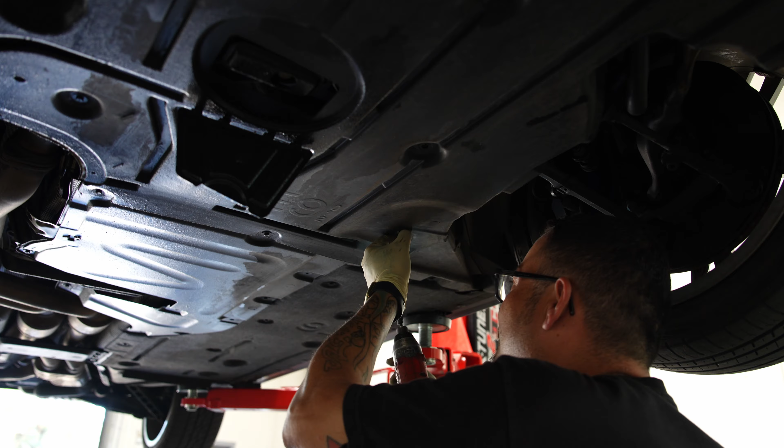Let's see if he gets it on his glove. It's a fail. It's looking a little dark. Pretty dark. It's pretty dark.

We're going to be installing our Burger Motorsports billet oil filter cap. We need to make sure you put the new gasket on this like this.

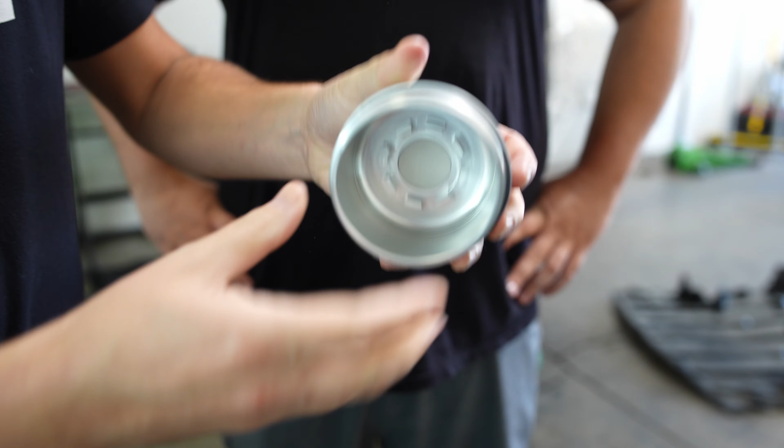Just so we know what we're really getting ourselves into, let's go ahead and have Chris cut open the oil filter and see if there's any shavings or bearing material, just in case. It's dirty, but no. Yeah, it just looks kind of dirty.

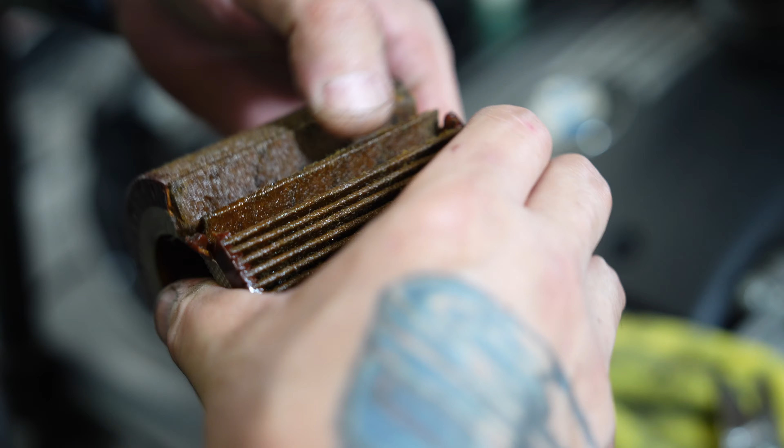So this is how you take out the filter cage to transfer over to the billet one. You just kind of pop it out, just like that.

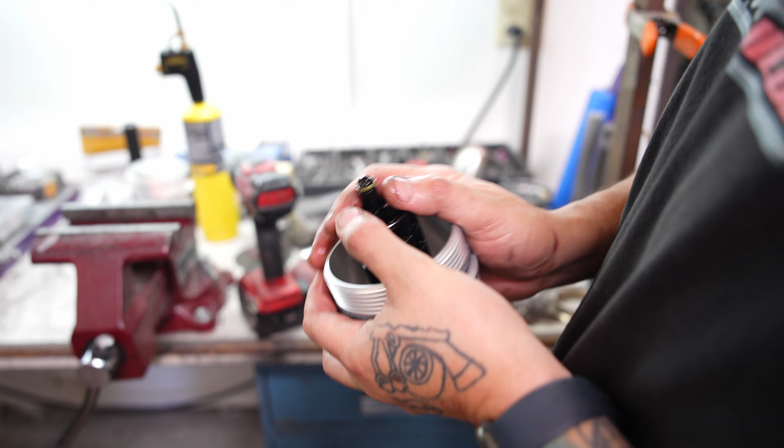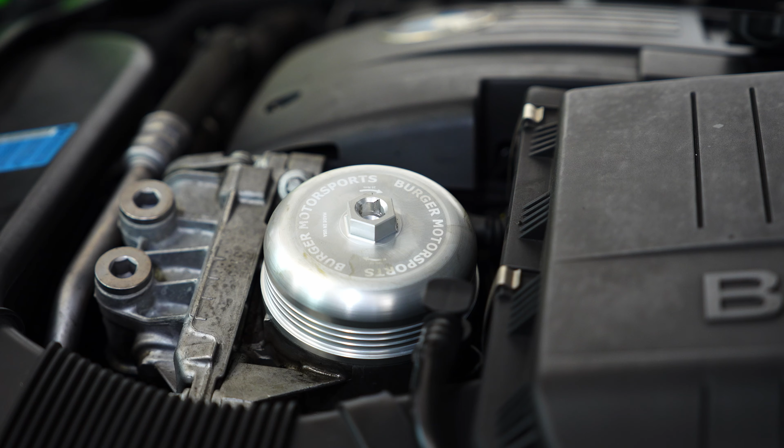We'll dive into the rest of it here in a bit. Let's take the car to the back right now, get it strapped down onto the dyno, and start swapping the plugs out.

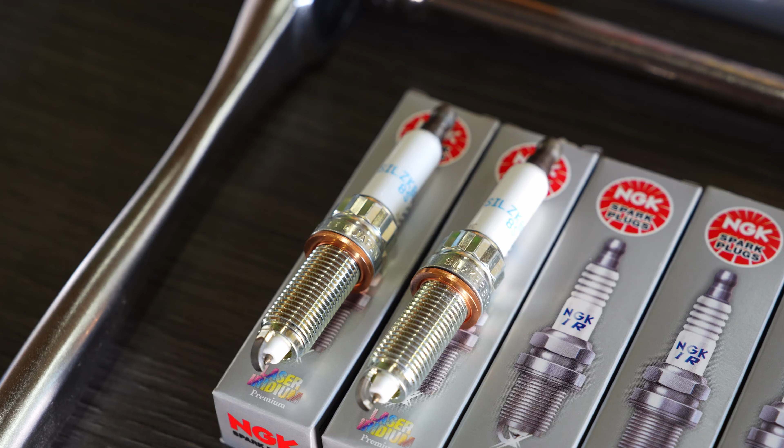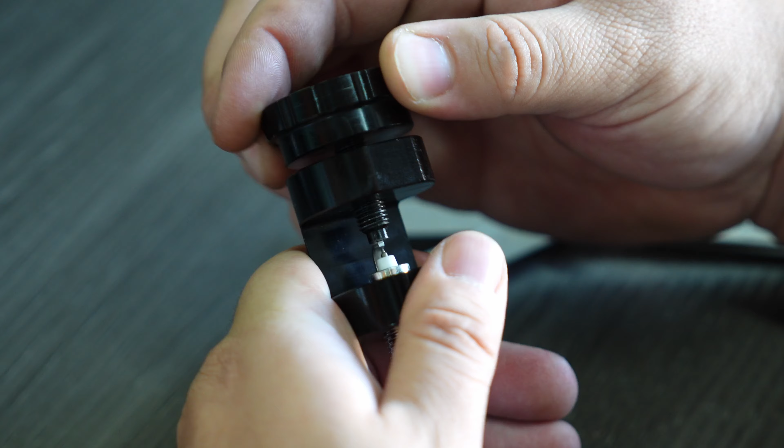Another important aspect to keeping up with your car is basic maintenance. Right now we're going to be doing the spark plugs. We've got the NGK 97506 we're going to be installing on the car. That is 2-step colder, and we're going to be gapping at 0.022. We've got our BMS gapper tool, our magnetic socket, and the feeler gauge. The feeler gauge has 4 different provided gap sizes.

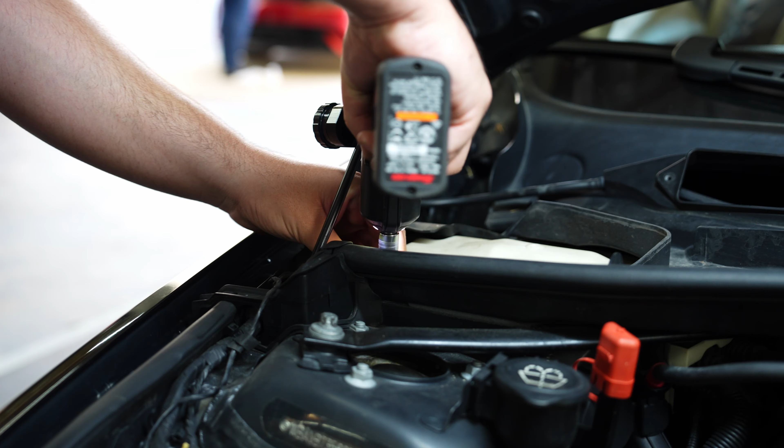So Pime has put the spark plugs on the E90. We're gonna go ahead and show you guys a bit of our catalog for all of our N54 parts.

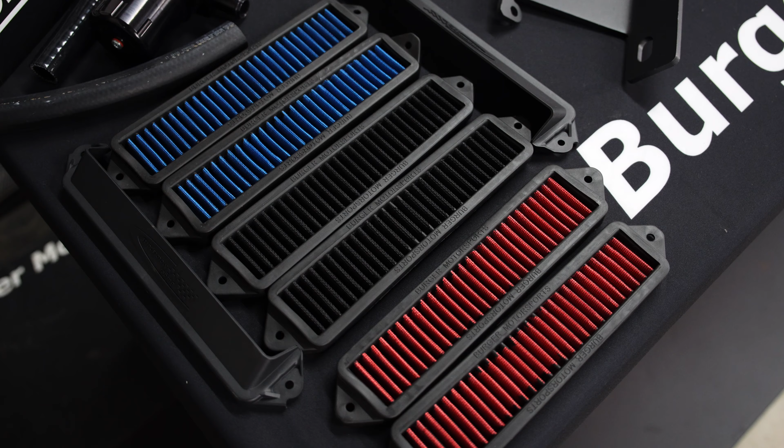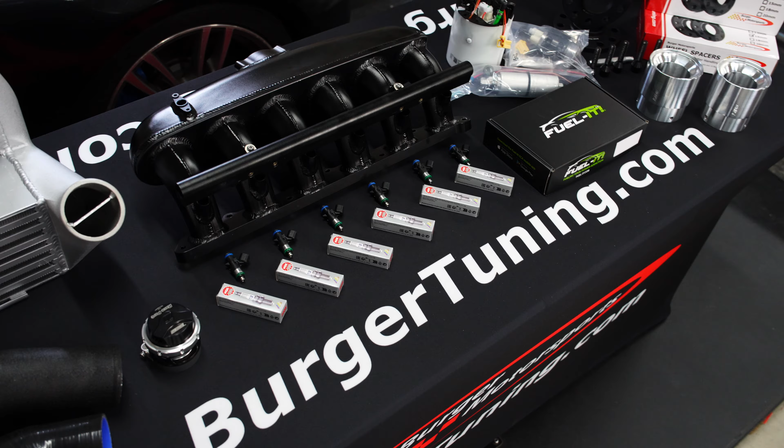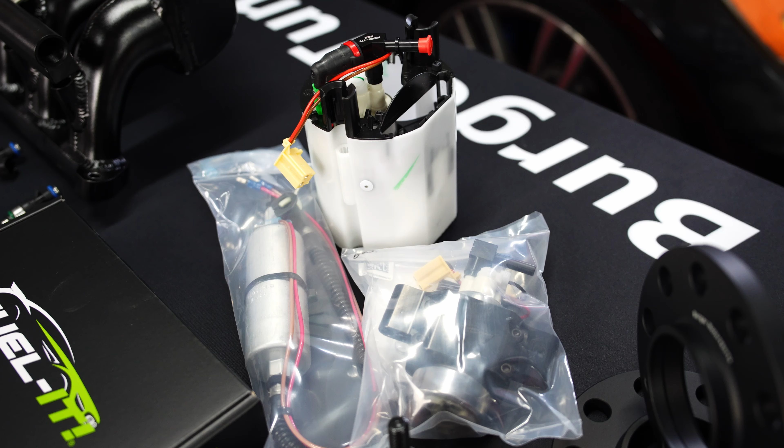Laid out behind us is about 50% of our N54 catalog. We've got Jason behind us. He's gonna go over some of these parts, their features, and which ones we're gonna be installing onto the car today. All right, Jason, let's go ahead and go over some of our parts we have here on our table.

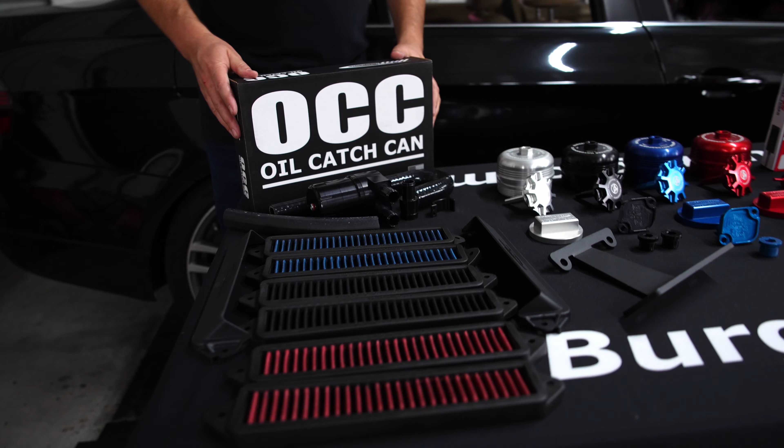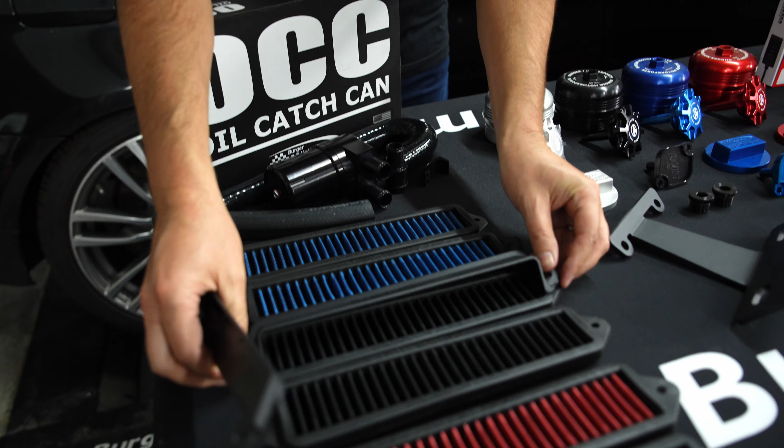All right, we've got our N54 oil catch can for keeping oil out of your intake system. We have our cowl filters for the cowl delete, and we also have this new product, the cowl filter weather guards that you just put on top of your cowls like that, and they bolt right on, and they keep water, snow, and moisture out of getting into your HVAC system.

We got the rear diff brace, which stabilizes the car and reduces wheel hop.

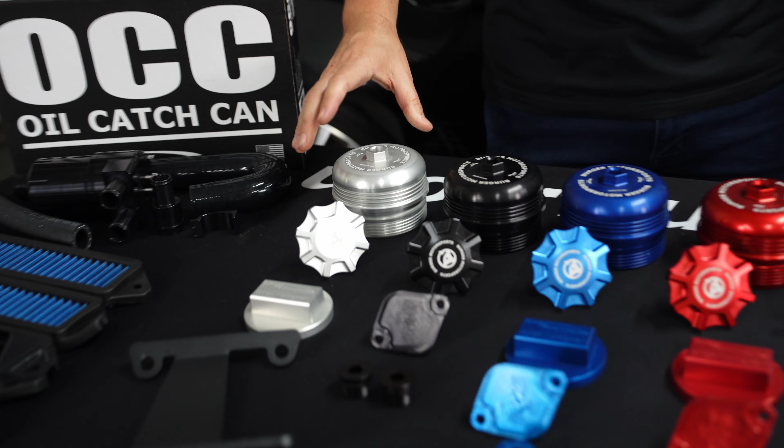We have these oil filter caps that are billet, and they have an integrated magnet in there which catches metal filings and shows the health of your engine.

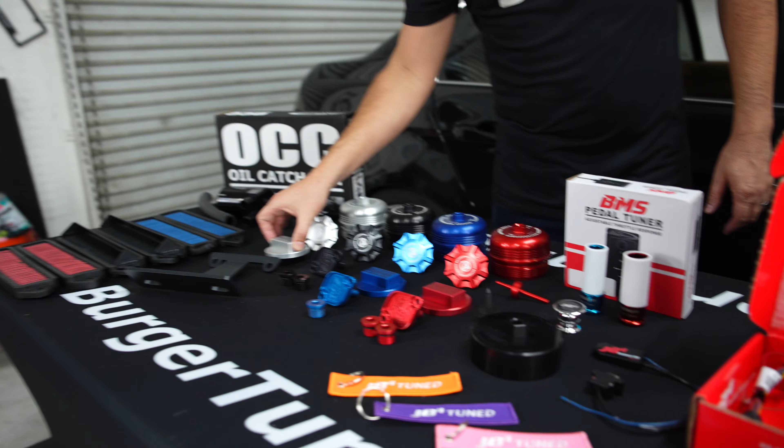The billet power steering caps, available in all colors. We have the jack pads here for jacking up your car with floor jacks. They go into a little pocket under the car.

These are some other billet accessories. This is an oil filter cap removal tool made out of billet for removing the factory oil filter cap. We have the BMS pedal tuner, which gives adjustable throttle response on the fly.

And we have these protective wheel sockets, which are actually really cool. When you're removing your wheel, this helps not scratch the rim when you're taking the wheels off.

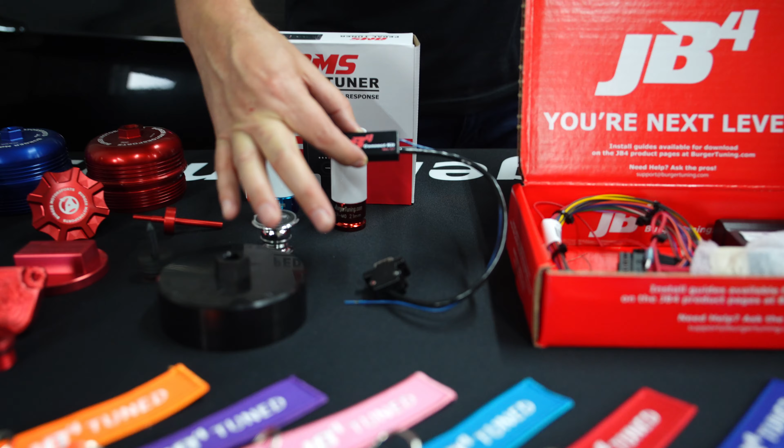This is the Bluetooth device that connects the JB4 to your phone or tablet wirelessly. We got the N54 JB4 here that we're going to be installing on our 335.

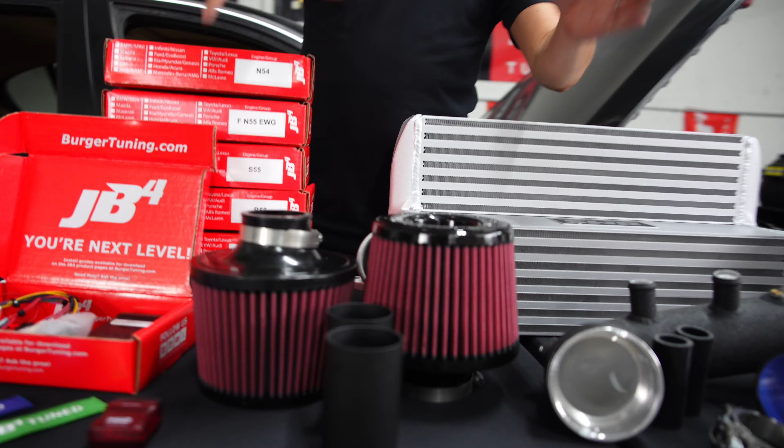The dual cone intake system. This is one of our most popular intakes, and it's so easy to put on. It's just a couple of parts, and it gives you like 30 horsepower.

We have our intercooler here. This is the race intercooler, which is really, really big and awesome.

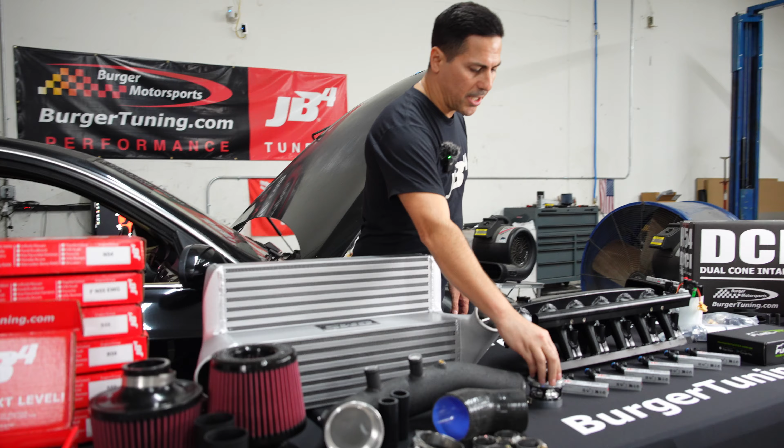We have the intake manifold with port injection.

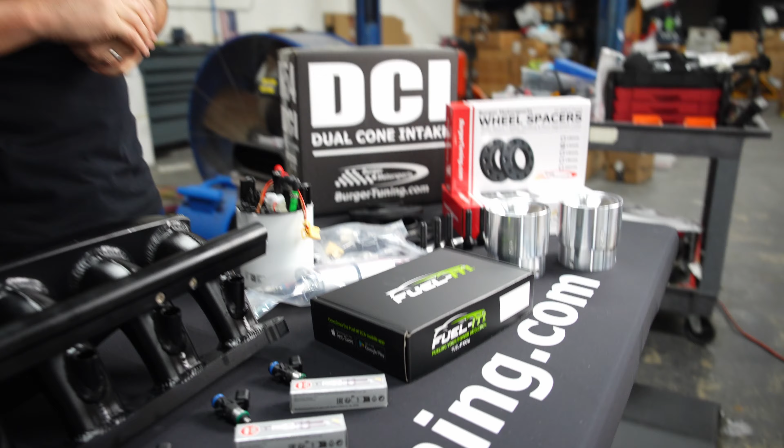We got the Fuel-It Flex Fuel Kit for real-time E85 levels wirelessly on your phone in the Fuel-It app or the JB4 app. Upgraded fuel pumps here from Fuel-It.

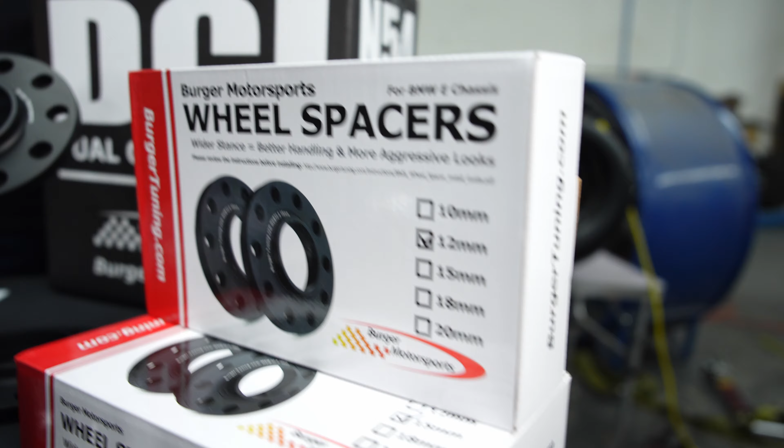We have our E-chassis wheel spacers, which are available in 10 millimeter, 12 millimeter, 15 millimeter, 18 millimeter, and 20 millimeter. They come with bolts, and if you buy 2 sets from us, you get a free wheel pin tool.

We also have the billet exhaust tips that just slip over your factory tips, and they look awesome. You guys will be seeing those later.

What are we going to be putting onto the car today? We're going to be putting on the N54 JB4 system, Bluetooth kit, and DCI.

After we do some runs with the JB4 system, we're going to upload the MHD flash. We're going to add some E85 and see how much we can get away with the low pressure fuel pump before adding our stage 1 or stage 2 fuel pump, depending on how we see fuel pressures are.

With all that being said, let's go and get the baseline numbers on our 335, and then we'll put the JB4 on it.

Chaim got the car strapped down onto the dyno. He's going to run the baseline runs after we get the car calibrated in 4th gear, bring it up to 2,000 RPM, calibrate it on the Dynojet, and then we are good to go.

The car is calibrated, ready to go. Let's get our baseline numbers here. Chaim, what do you think it's going to make here?

260. I'm going to have to say that I agree with Chaim here. Angel, what do you think it's going to make? 261. Jason, what do you think it's going to do? It's going to make 265.

Bunch of fun guesses here, y'all. Let's see what the stock 335i makes here on the dyno. Here goes a stock baseline run on a 2008 335i with an N54.

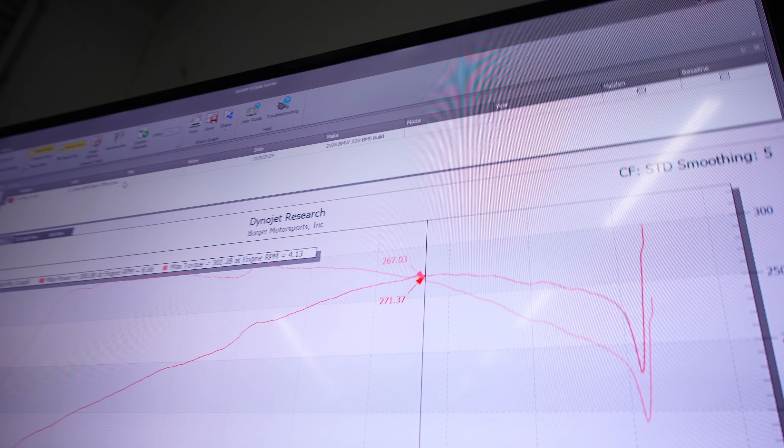We're looking at about 271 wheel horsepower, but because we have the spike right here, we want to run it again, see if it'll make a little bit more accurate number.

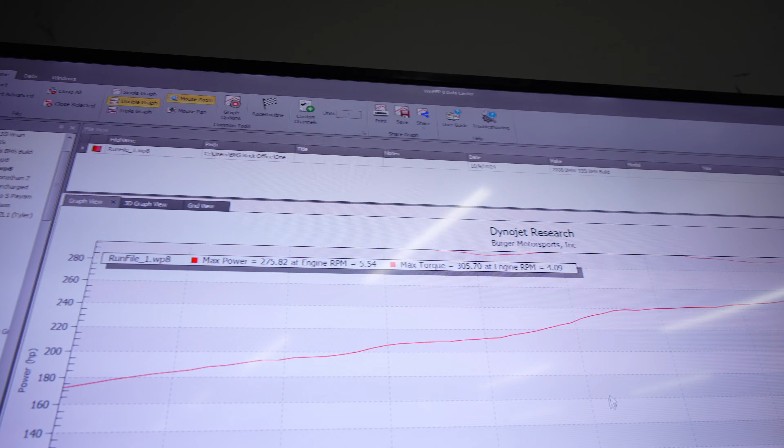Made 275 wheel horsepower and 306 wheel torque on a bone stock N54.

All right, we're gonna do our E9X cowl delete. This weighs about 10 pounds, and we're gonna replace it with this that weighs nothing.

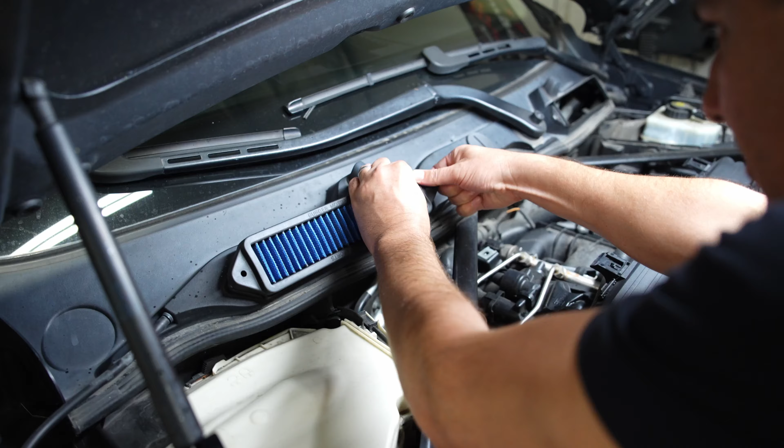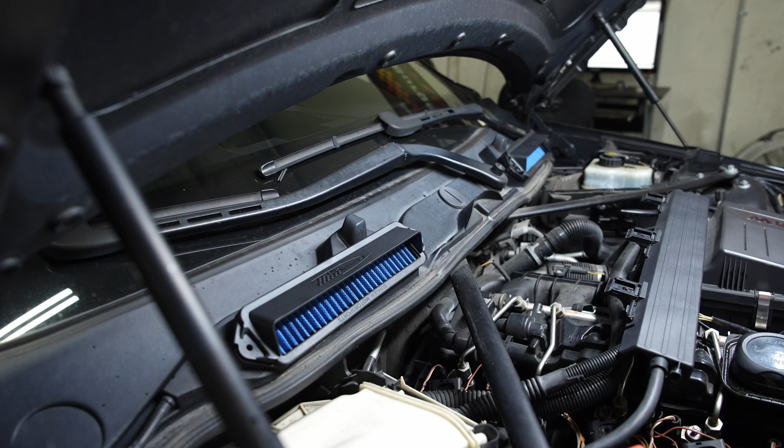Now that the cowl filters are installed, I'm a beautiful boy.

Here is our JB4 for the N54, sitting behind us with our JB4 Connect kit that can connect to your phone or tablet, as well as our MHD universal adapter that will be flashing our pump gas back-end flash map from Burger Motorsports.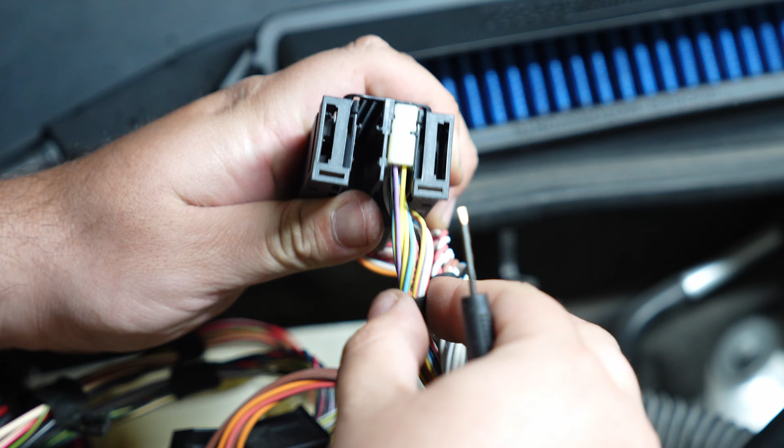The JB4 is now installed on the 335. Piam's gonna go ahead and get the MHD back-end flash put onto the car, our BMS back-end flash that is. We will be putting the pump flash on it today as we're just running 91 octane for right now. Because this platform is so old already, most people don't have any reason not to put a flash on their car, so we're just gonna do it from the get-go. We're not gonna run JB4 only.

We want to see what the car does with our pump back-end flash on it that we make, Terry Burger makes. The nice thing about having the JB4 as well as our Burger Motorsports back-end flash is that you can make all adjustments on the fly. You don't have to wait for any local or e-tuners to help you out with your car and get it dialed in however you want for whatever fuel you're using.

MHD is the leader in flashes for these cars. What's super nice is that the JB4 back-end flash map for these cars is under $100, so it makes it super affordable. You don't need to go spend hundreds or thousands of dollars in tuning. You guys can just go spend under $100 on top of your JB4. You're good to go. You can tune it on the fly whenever you want, wherever you want.

We're gonna start off with our pump gas map right now, but we also have them for E85, port injection, hybrid turbos, whatever you guys have. We have the back-end flash for you on jb4tech.com.

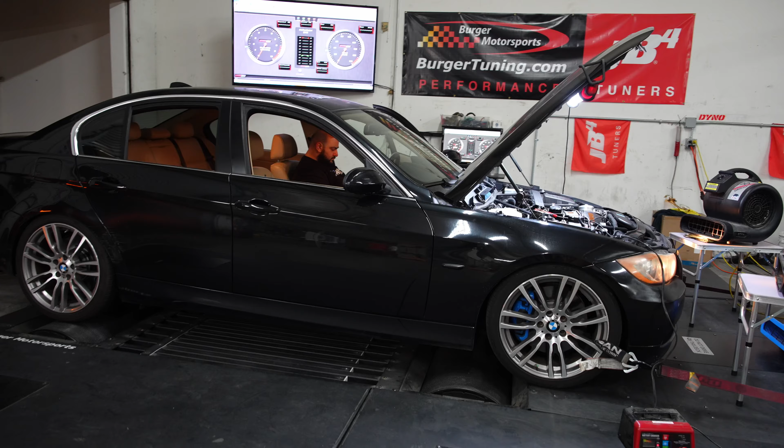Something that's super nice with the JB4 is that it includes tons of great features like absolute boost targeting, automatic wastegate adjustment, which is ideal for older cars, in-dash gauges, auto tuning, dynamic boost by gear to improve launches, and much more. We just got the MHD and the JB4 installed.

Let's toggle through the command mode menu and show you guys what the JB4 can do. Right now you can see it's on map 1. I can toggle through the channel switch and change the maps, different modes for different folders. In the menu settings, right now we set everything up.

An example of what the JB4 can do is that I put hijack mode, boost on fuel, timing on oil temp, so when pedal goes over 50%, it hijacks the two bottom gauges for a couple seconds and then it'll revert back to normal, as you'll see now. There you go. So it's useful for when you're racing and you can't really look at your phone or you don't have a data viewer to see how your timing or boost is. You want to make sure it's on target. You take a quick glance down there while you're racing and you got everything that you basically need.

Let's see what it makes on the Burger Motorsports back-end flash with MHD and JB4 set to map 1. The car made 329 wheel horsepower and 397 wheel torque on our Burger Motorsports back-end flash with the JB4 set to map 1. The car made over 50 wheel horsepower and nearly 100 wheel torque more.

Let's go ahead and kick the car over to map 2 right now with 91 octane in the tank, still the exact same Burger Motorsports back-end flash. Here goes JB4 map 2. Alright, let's see what she did. Car made 348 wheel horsepower and 412 wheel torque, JB4 map 2 with the pump back-end flash on it.

The log is showing a little bit of timing correction, so to jump to the next level we're gonna need some E85 into the tank. We're gonna take the car to an E40 mix and then just flash our E85 back-end flash onto the car. Once the E85 Burger Motorsports back-end flash is loaded onto the car, we'll switch it back over to map 1 and see what numbers we get.

E85 map is on the car. Let's see what it does on JB4 map 1 with E40 in the tank.

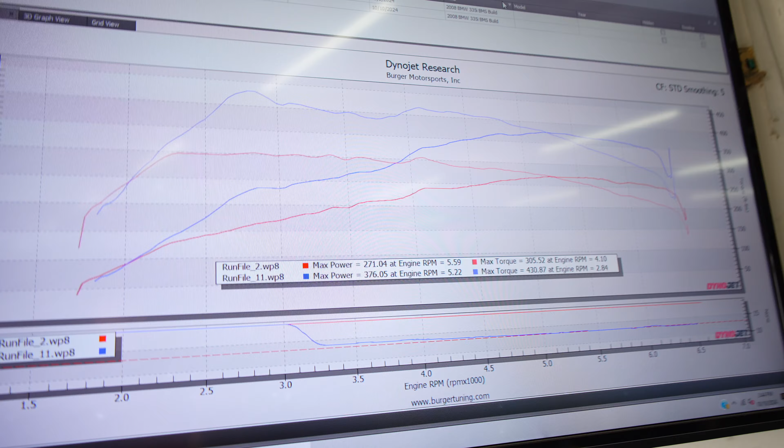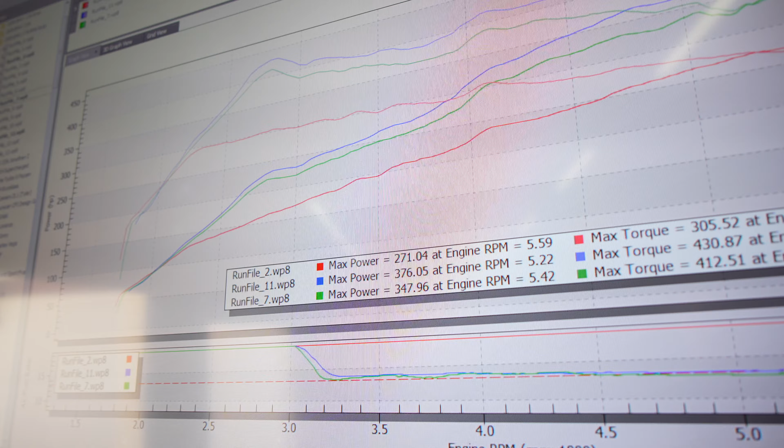376 wheel horsepower and 431 wheel torque, JB4 map 1 with the back end flash loaded. So we got a little comparison here. On JB4 map 2 with pump gas in the tank, it made 347-348 wheel horsepower and 412 wheel torque. That JB4 map 1 run with the E85 back end flash did 376 wheel horsepower and 431 wheel torque. The car just gained another 30 wheel horsepower and 18 wheel torque.

Looking through the log right now. Trims are good, boost is on target, ignition timing looks solid. I see a little issue here with fuel pressure, 48 running low, tapering down right at red line. So it looks like we might be at the limits of the low pressure fuel pump. We'll do a map 2 run and see if it can hold up. If not, we'll install the Fuel-It stage 1 inline fuel pump.

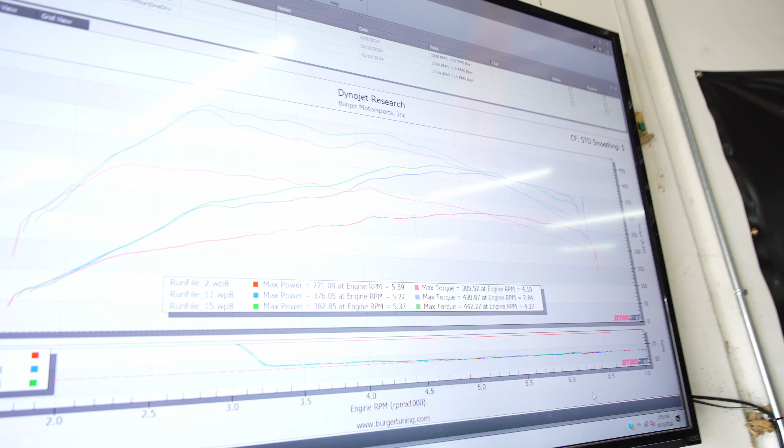After what Pime said, we're gonna run JB4 map 2 right now on the E85 back-end flash. What did she do? 382 wheel horsepower and 442 wheel torque, JB4 map 2. Gained another 12 wheel torque right here, and about 6-7 wheel horsepower.

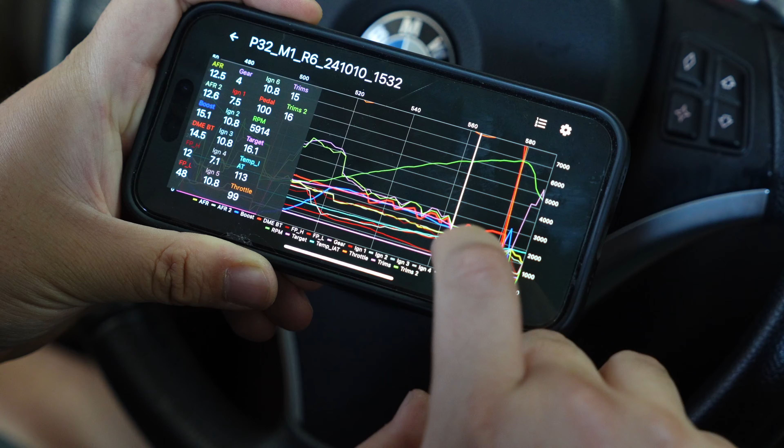Now that we just did our map 2 run, I'm reviewing the log. Boost looks great, AFR, fuel trims all look good. I see timing pull up top. Fuel pressure is dropping a lot down low. This looks like the most we're able to push it due to octane and fuel pressure. So before adding E85 into the tank and raising boost, we need to upgrade to the Fuel-It Stage 1 low pressure fuel pump. Here's our Stage 1 fuel pump from Fuel-It, gonna be installing this on the car right now.

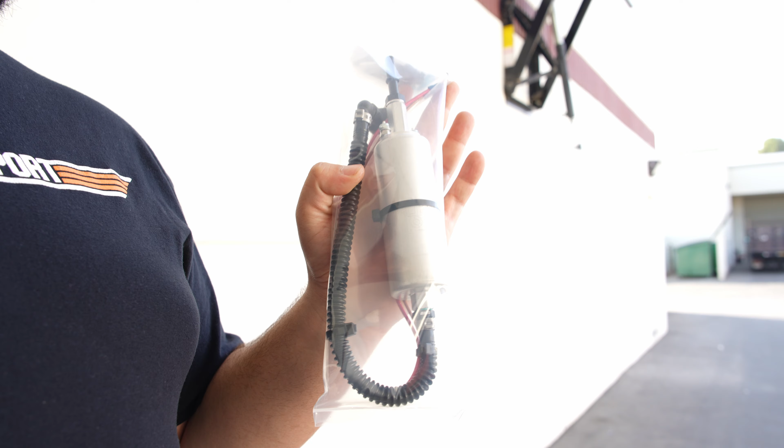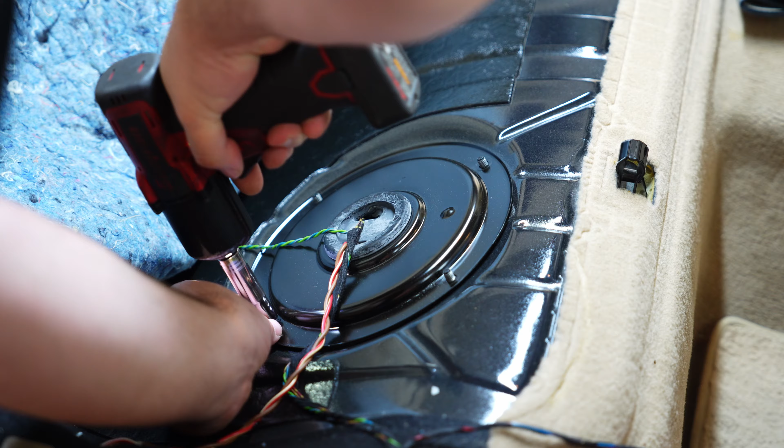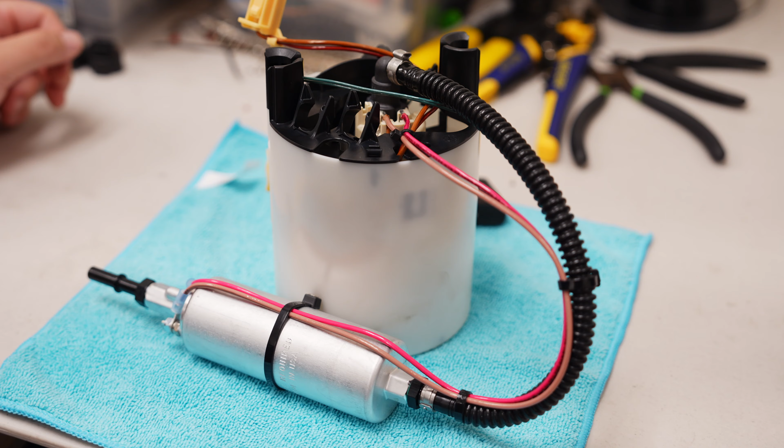I've just got the fuel pump put into the 335. We're gonna go ahead and run JB4 map 2 again on the same E85 back-end flash with E40 in the tank. So we knew it was going to make about the same power.

Let's go talk to Pime and see what he thinks about getting the fuel pump installed. We just did a run on map 2 again, just like before. Low pressure fuel is staying steady all the way to red line, 73, all the way 70s.

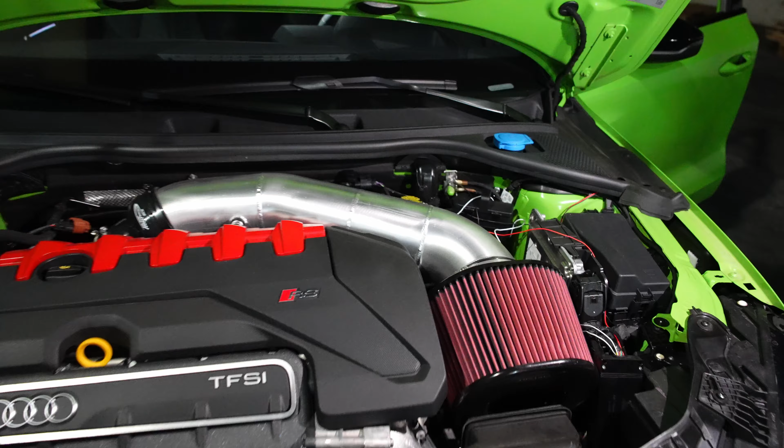Very sweet. All right, here goes JB4 map 7 on the 335i. 393 wheel horsepower and 466 wheel torque.

I'm looking at the log right now from map 7. Everything looks okay. IATs are hitting 131. We're still on stock intercooler and stock airbox. I think we're going to go ahead and add the BMS DCI.

We've been selling tens of thousands of them since 2008. We've had the internet trolls claiming that a cold air intake doesn't add anything, but we're about to prove them wrong. We're going to install it right now, show that it helps with IATs, looks great, sounds great, and it's 50 state emissions legal.

All right, so we are going to go ahead and throw these dual cone intakes on.

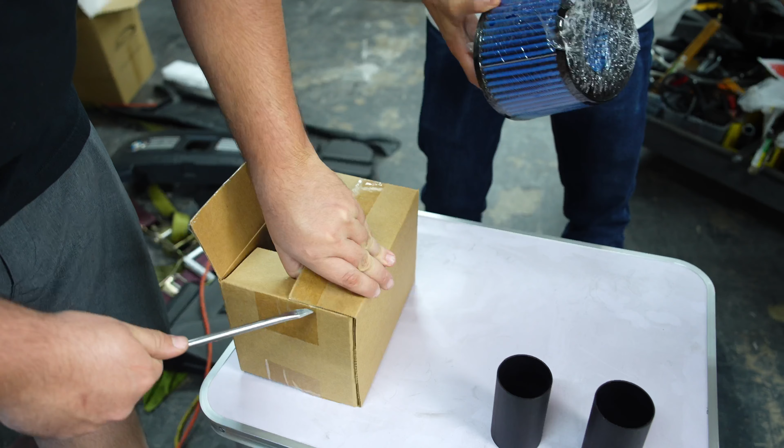I've just got the dual cone intakes put onto the car. We're gonna go ahead and let it warm up, do some more runs on it, see what kind of power it can make with the intakes on the car. We'll run map 7 again and see what it makes on the dyno. Fingers crossed, we'll see if she makes 400 wheel horsepower.

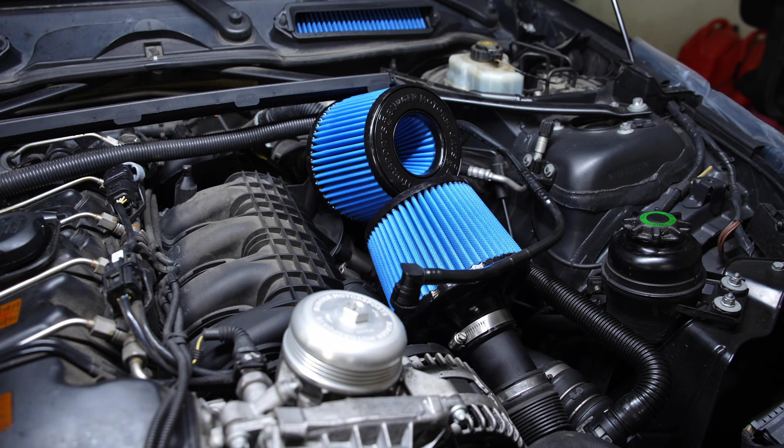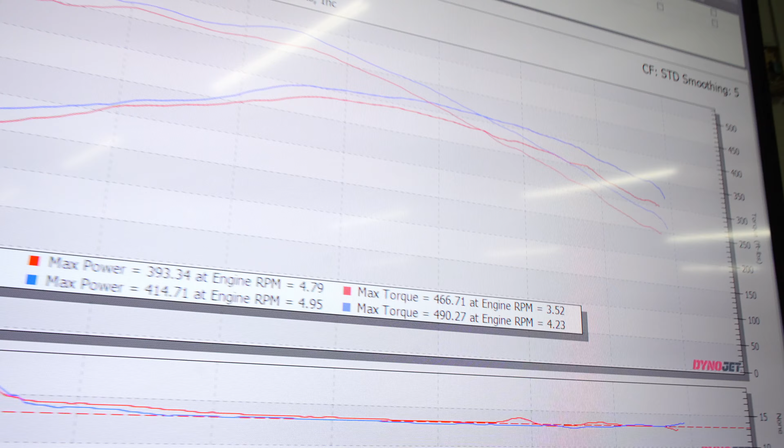Those intakes, all the way from back there, made 414 wheel horsepower and 490 wheel torque. Those are massive gains for a dual cone intake, 21 wheel horsepower and 24 wheel torque from our N54 dual cone intakes. That's absurd. That just shows how restrictive that factory air box is.

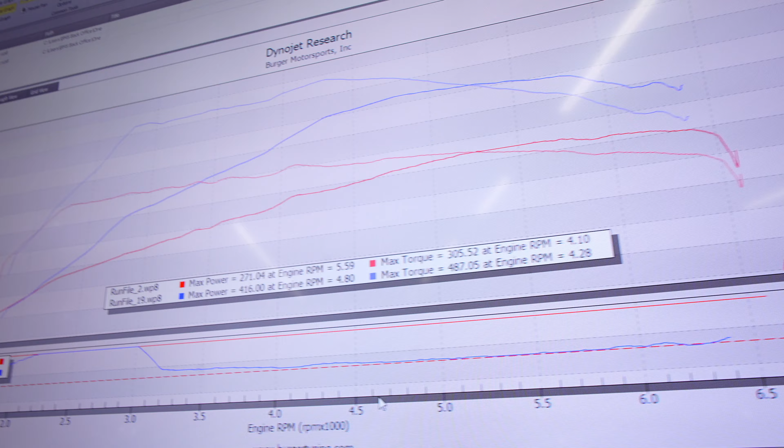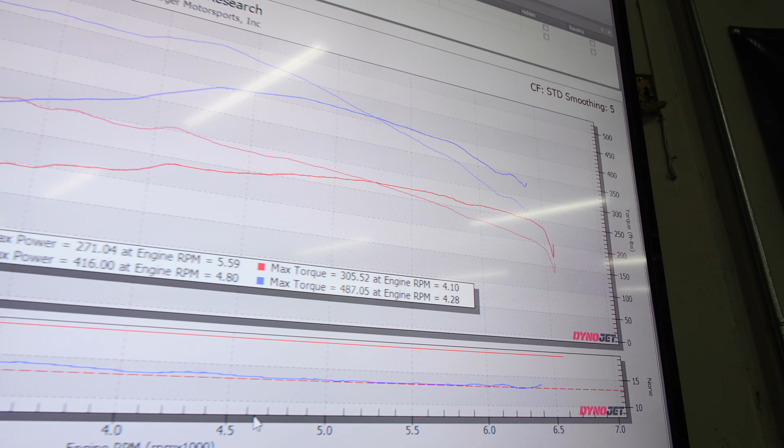We got on the dyno on 91 pump gas. It made 271 wheel horsepower and 305 wheel torque. After putting the JB4 on it, dual cone intakes, and an E40 mix with our stage 1 Fuel-It low pressure fuel pump upgrade, the car made 416 wheel horsepower and 487 wheel torque. That comes out to be a 145 wheel horsepower gain and 182 wheel torque gain.

Was making 270 horsepower stock, and then they're making 450, 480 horsepower like this. That's a lot, back in 2009, 2010, you know what I mean? Like this, the only thing that would be like that would be the big dogs, the Corvettes, or something of that kind of level, like a supercar. What, an inline 6 keeping up with a BMW fast in a straight line like that? There's no such thing. That's why the N54 honestly literally changed the whole game, the whole industry back in 2007 when it first came out.

It really did, and that's basically what started BMS and how Terry got into this whole thing. Before, he was still obviously into racing, but getting into Burger Motorsports, the 335, the N54, is what started it. There's a reason why this platform blew up as much as it did. Burger Motorsports was pretty much the head honcho of starting all of this in the first place.

Everyone else followed after. We have a lot of great content coming up with this car in future videos. The next step with the car is going to take it up to full E85. To do so, we're probably going to need a high pressure fuel pump upgrade, or we're gonna go port injection. We'll go with our all new CAN fuel system, show you guys it operating on the N54, and go from there. Probably gonna do some off-road test pipes.

Then from there on, it's whatever you guys would like to see with the car. We may take it to some future half-mile events. Let us know down in the comments what you guys would like to see next with the car.